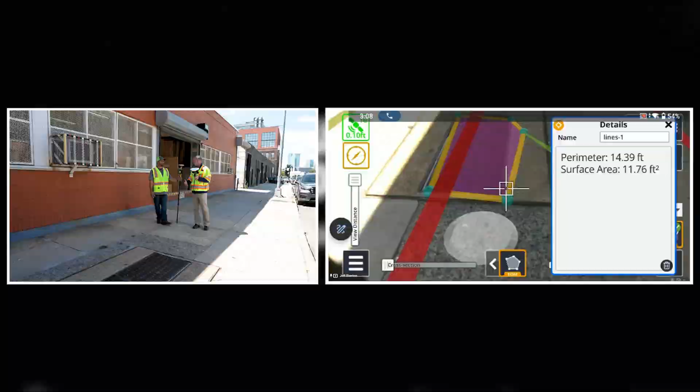Good afternoon, everyone. Actually, all of my presentation was covered in the previous panel, so everything I'm going to say is just a repeat of what the previous panel said. Trust but verify—AI is not there to replace engineers, so just brace for that. Repeat information, I've given you a heads up. All right, can we get the computer share on the screen?

As that comes through, what we're going to do is just walk over what 4M as a product is, a quick overview, and then Matt and Ed will go over a real-life scenario—what happens in real life, how do you tackle it, the challenges of utilities, and how hard it is to navigate through the maze that we have put up as a human civilization underground, and these guys have to deal with day in and day out. And then we will have, as Justin said, actual on-site demonstration.

There's a Trimble team out there. Today the weather is nice, so I'm not feeling sorry about that, but when they were in Georgia, they were out there in the cold. So today is a better day to be out. And they will demonstrate actual augmented reality, how the data from 4M streams to Trimble.

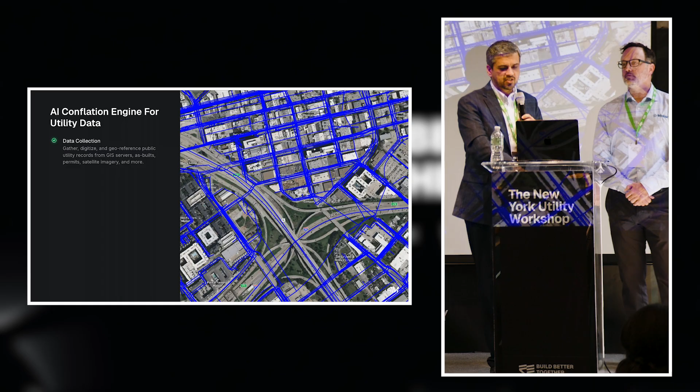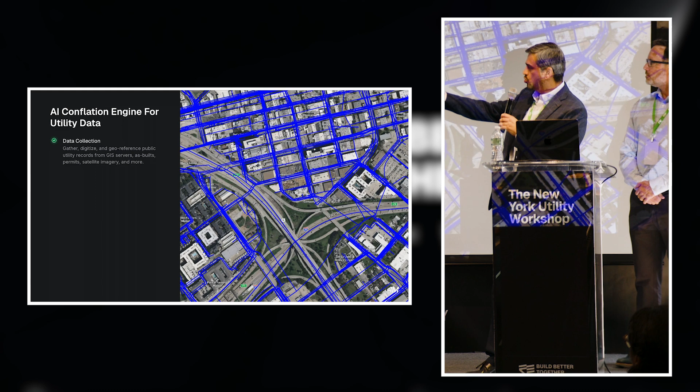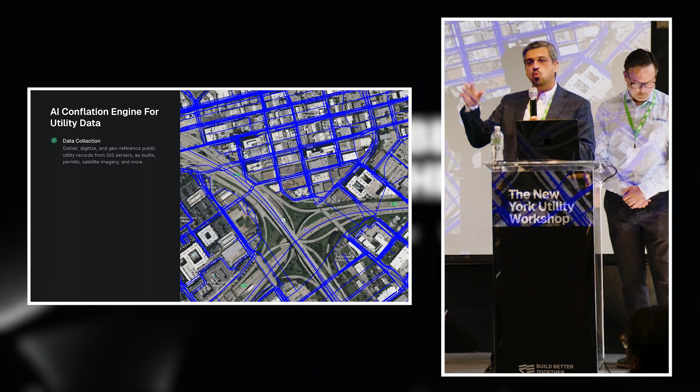So here is a quick overview of how 4M works. We started with collecting public records. Here's an actual view of Dallas downtown—all the lines you see are what we found in public records. In an urban environment, as you can see, it's not lack of data, it's too much data. One data source shows the line in the middle of the road, another says it's on the other side—it's chaos.

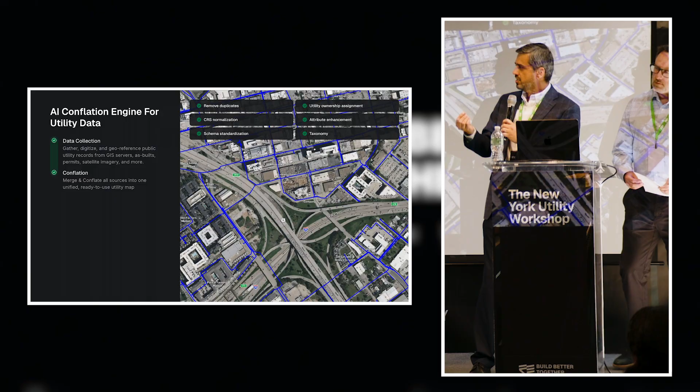So the first thing we built, about three years ago, is a conflation engine which can take all of these data sources, millions of records at a state level, bring it down, remove duplicates, and figure out the coordinate challenges. But that was just the start.

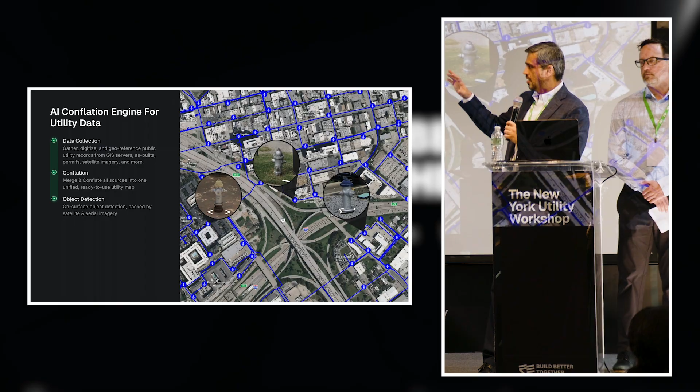Where we evolved from that point is now looking into the image processing side of things. So now we are combining the public records with actual imagery, street-level imagery, aerial imagery, satellite imagery, and finding evidences of where the utilities are. Those are on-surface utility objects, but we are not stopping there. We are going and identifying road marks. If you want to find out where the utilities are, today all you have to do is call 811 or submit a ticket, and someone will come put all these road marks on the ground.

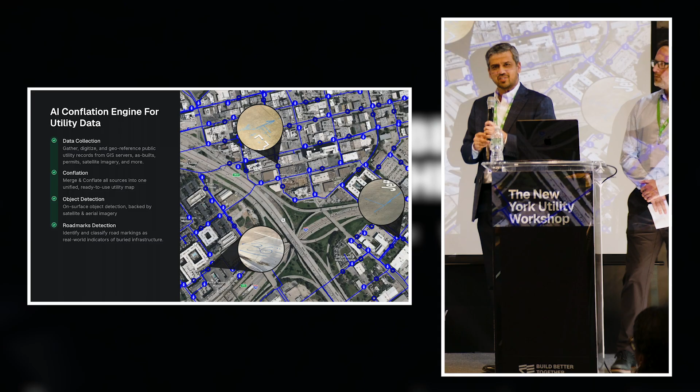So is the data truly secured and hidden? No, it's available to anyone. I can walk and literally figure out there are road marks on the ground for gas lines, right? So in a way, it's public information.

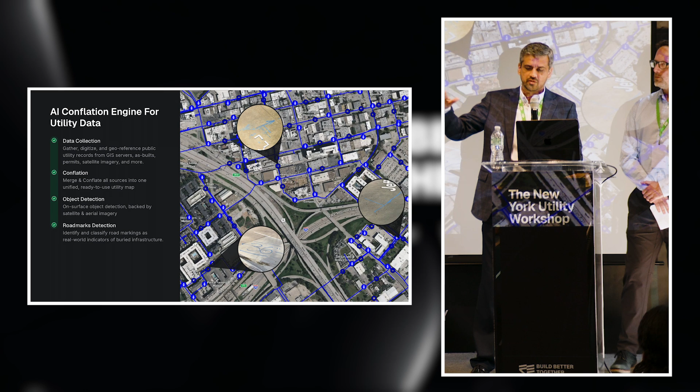So we are just honing on that fact, collecting historic imagery going back multiple years, and I'll show you in the demonstration. That creates a whole new product and intelligence layer, which is now bringing together the GIS records, the on-surface objects, and the road marks.

The next evolution, which will literally happen in a couple of months, is we are now going to create 4M-based lines, meaning these lines never existed in any record. There was no indication, no permit, no document in public record indicating the line existed. But now we have historic evidences where either based on the trenches, based on the locator marks, or based on the on-surface objects that we see, 4M can now compile all of this information from the history to the present.

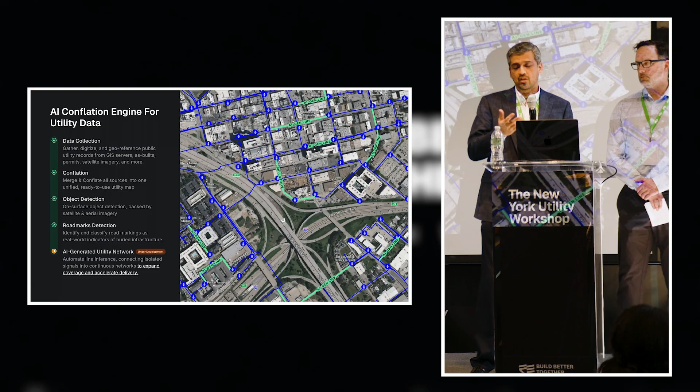And say we have a high degree of confidence a line is present over here, or a medium degree of confidence a line is somewhere over here. So not only are we giving you the information, but we are also sharing our confidence on that line, because in some situations we may have a very low degree of confidence that a line might be there. And you as an engineer, trust but verify — you need to go and act on that information.

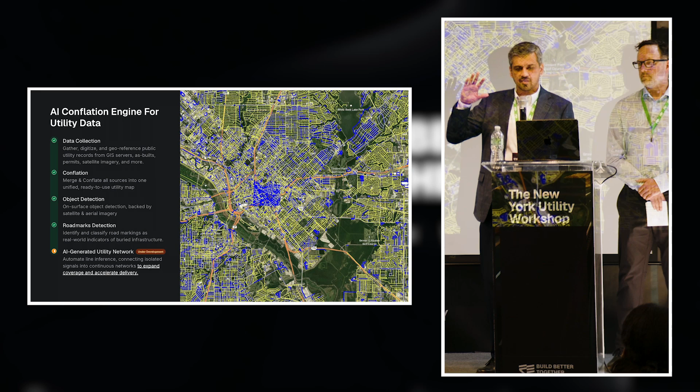So we are doing this at scale, so it's not only one particular project, but it's happening at a state level. By end of this year, it will happen at the entire nation level, all 50 states. And that truly creates a unique data set.

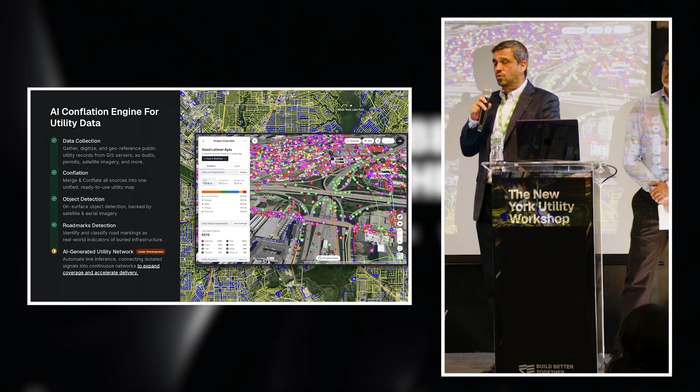Back to previous panel's discussion, like AI as a next-word prediction is what we have with these large language models. But with this type of data set, what we are building is truly a utility subsurface model, which will be way more than just predicting the next word — it's about predicting what are the challenges in infrastructure.

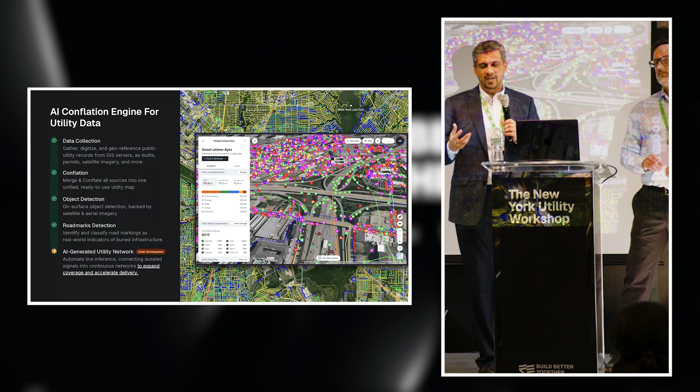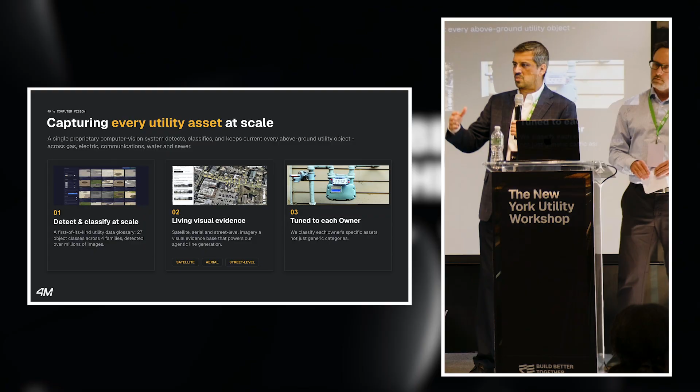As I said, we are detecting multiple evidences at scale, building that live visual evidence base. And for the utility owners, we are working with them to tune our model for particular evidences. For example, in the New York area, working with National Grid, they have certain indicators which are National Grid specific, so that's fine-tuning of our model. As we work with more and more owners, the quality of our visual inference becomes better and better.

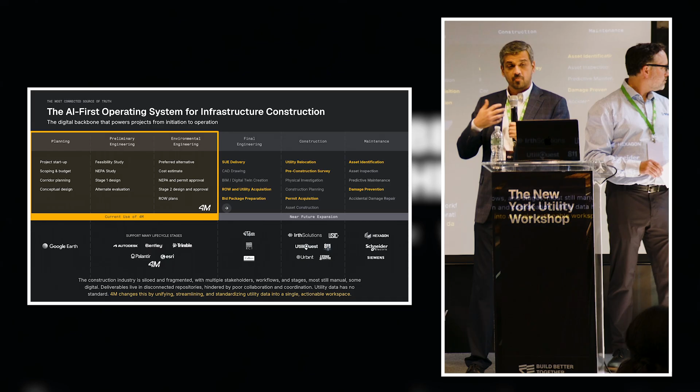This is something very interesting that we are finding. As Ed mentioned, we are working with multiple DOTs, and our initial proposition was — our data, again going back to the discussion of accuracy, we are not claiming our data is most accurate. So myself, as a product manager, I thought the best use case is in the planning phase, where you can use 4M to identify what risks and challenges you're going to face in that project. But as we started working with DOTs and utility owners, we're finding our information, the map we provide, is actually applicable in the later phases of the project too.

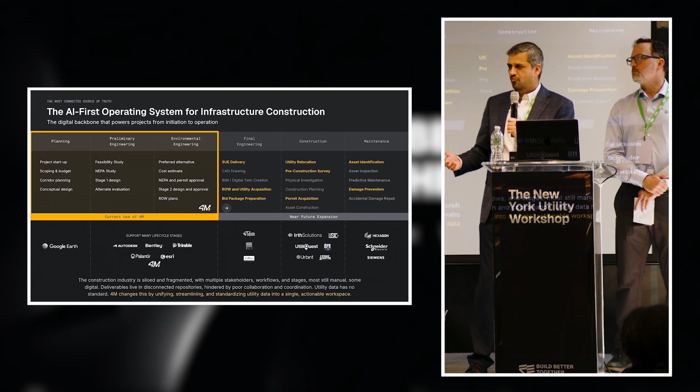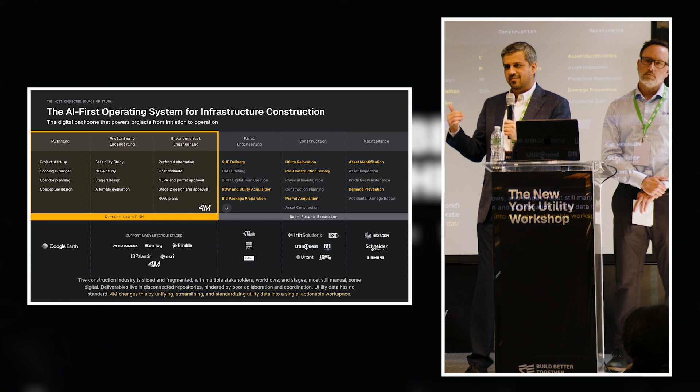We have DOTs using our product for emergency maintenance use cases, because without our product they were just going out there without any data, relying on surface objects alone. With our product, they have much better visibility going into a project. As we work with National Grid, there are damage prevention use cases that we are uncovering too.

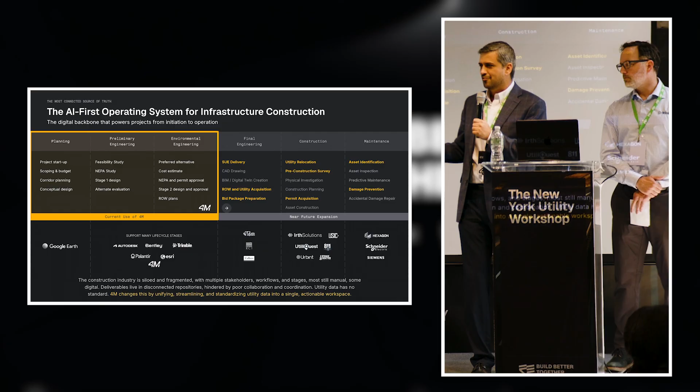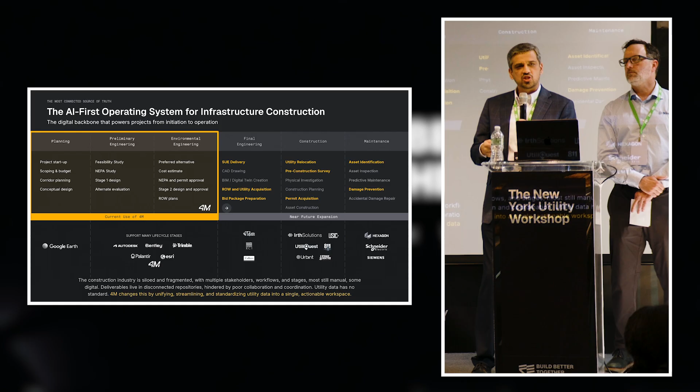So industry — and again, the topic of today's conference, Build Better Together — we are coming together, we as a technology provider, owners and engineers, figuring out how do we take this technology and how do we solve the multiple workflow challenges that we all face.

Before I jump into the actual use case, this is something we are evolving into: the 811 responds to a ticket dynamically based on our data. Again, this is not replacing any existing workflow at all. We're not saying don't send locators, that's not what we're saying. Rather, this is an additional technology, a due diligence you can do on a ticket on top of everything else. As an industry, we're all trying to reduce damages and make our infrastructure safer. Our product just adds another value addition to that overall ecosystem.

So with that being said, I'll hand it over to Ed to talk about the use case.

Perfect, all right Matt. So it sounds like you're dealing with the conflict and potential project. You want to give us a little overview on the site? Sure, so good afternoon everybody.

For today's exercise, I wanted to give the team the most realistic exercise to walk through. So the example we're going to give is on the street outside. The city of New York is replacing a water main that's 100 years old, and they're going to bid it out to a contractor for replacement. Exactly where they want to install their new water main, National Grid has a gas main in that area. So through the relationship with the city of New York, we're going to relocate our gas main, and National Grid is looking for the best location to relocate our gas main to give the city of New York the best lane possible to install their new water main.

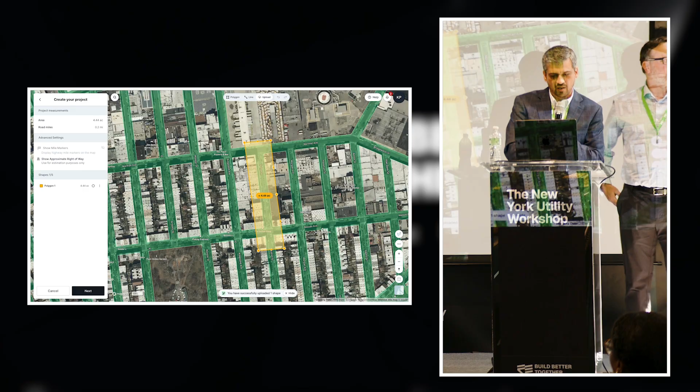So we'll start with a quick demonstration. We heard from Matt what the project is that we're going to do. So what I'll be doing is just coming to the product. I already have created a polygon, which is the exact location where we are at. I'm going to click on next. Let's call this gas excavation, energy, and let's say we are just studying what's out there.

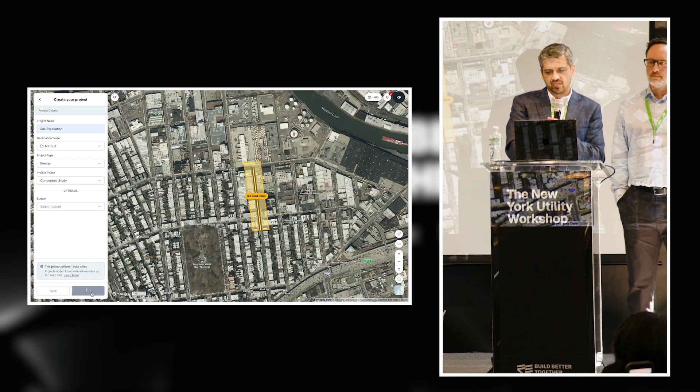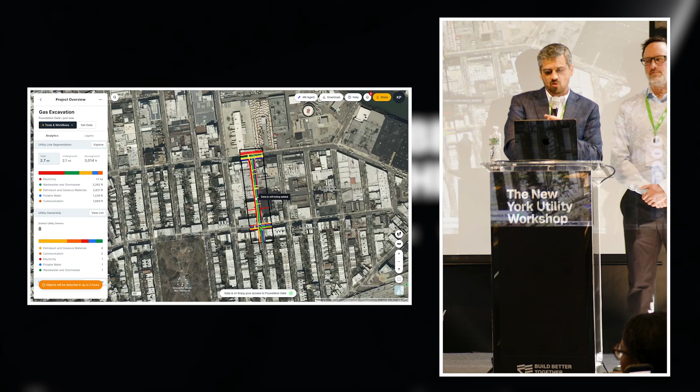And let's look at the utility map. So I hope my internet connection works. There, within seconds we have the GIS records streaming in, right? So all the GIS records that we have collected from public information is over here. But as I was mentioning, this is not enough.

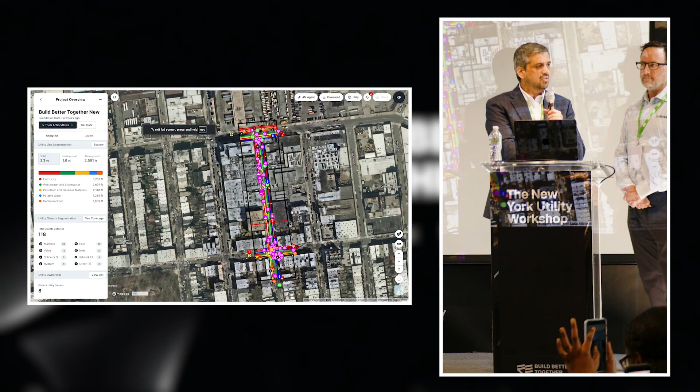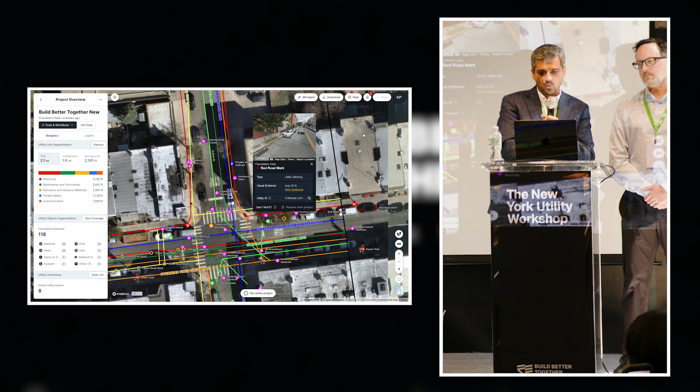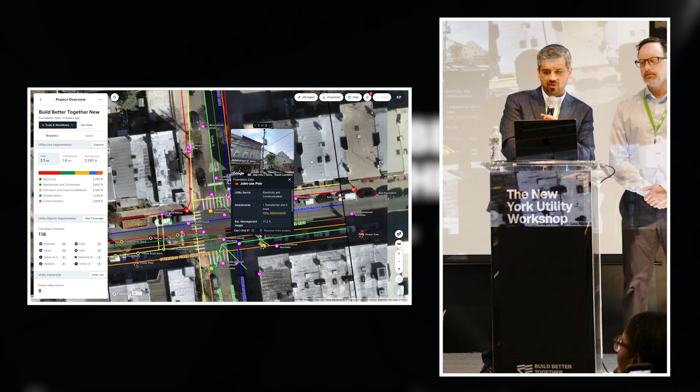Let's look at how the fully evolved product looks like. Within a few minutes, for this size of area, I'd say it will take 20 minutes. Within 20 minutes, we'll have all of this imagery-based analysis done. So we can say, all right, there are road marks that we identified. These road marks are coming from 2018. If we look at some other road marks over here, they're from 2021. If we look at the pole attachments, here we can see an electricity pole identified, the loop attachments, the splice enclosure, and let's actually go to the problem area.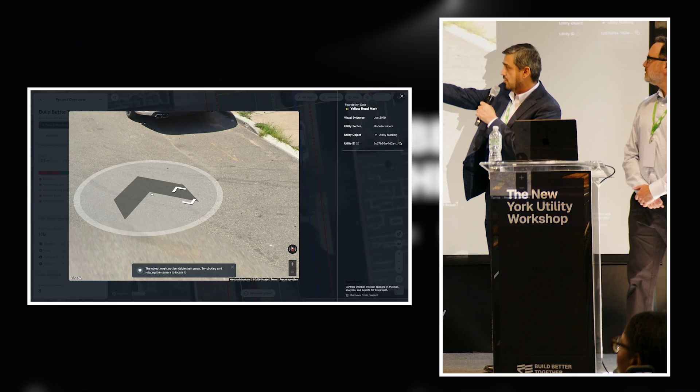So here, based on what Matt mentioned, National Grid has to move a line over there. So there are road marks. For example, you can see this yellow mark on the road that we've captured, how faint that is, but our algorithm is able to capture it. Not only capture that road mark, but place it on a map. That's something we've developed for the last two-plus years, the ability to capture things at scale across a different timeline.

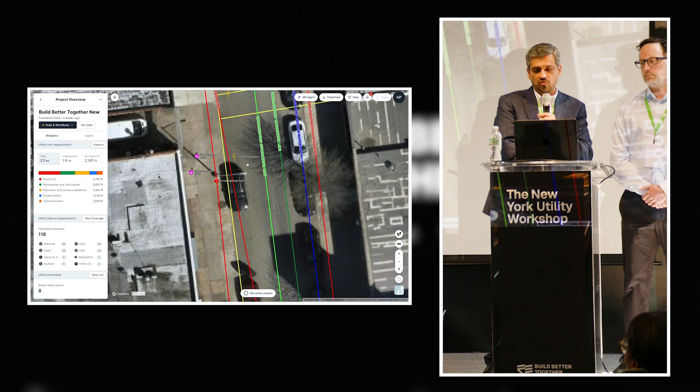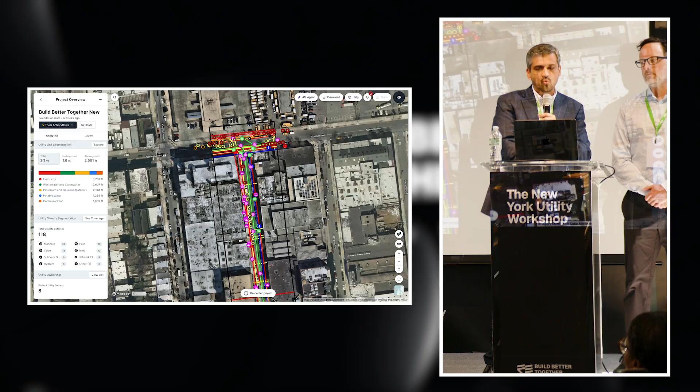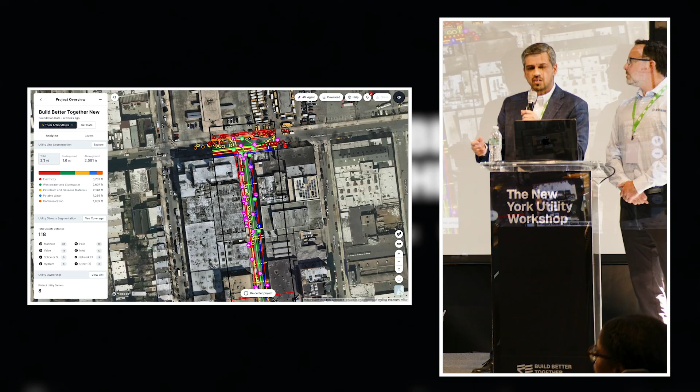So within a street, we can go back 4, 5, 6, up to 10 years, capture those things, and place it on a map. So when you're going out in the field, you have a very comprehensive view of what's out there. You can see the gas line road marks over here, plus some other utilities, plus some on-surface objects. That is literally what you get in a matter of a few minutes. To get to this level of data using conventional process, it would have taken maybe a few weeks, at least a few days. So now we've really crunched that time to first data using our product.

And I'll hand it over to you.

Thank you, KP. How many of you are familiar with Trimble by a show of hands? Okay, all right, good amount. So what you see here is Trimble Connect, and through an integration that we've done with 4M, we've been able to pull that data into our common data environment called Trimble Connect.

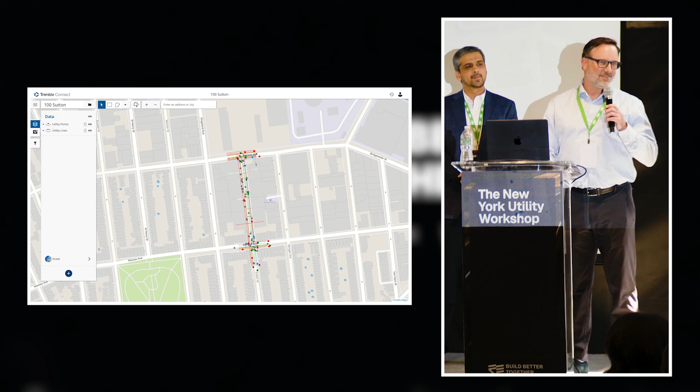Most people know Trimble as a survey company—GPS, surveying, mapping. I'm still learning, after 17 years, all of the things that Trimble can do in the construction world: building construction, land construction, road construction.

Trimble Connect sits at the center of the physical and the digital world. Trimble has lots of office tools that allow you to plan, permit, maintain, design, and engineer in the office. We also have our survey tools, scanning tools, and data management tools for our field crews. Between that digital and physical world is what you see here, Trimble Connect.

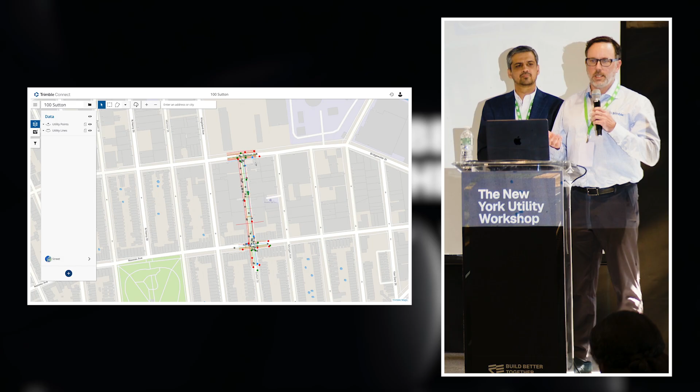This rich data set coming from 4M, using their methods to capture this data, is pulled in by this Trimble extension. That enables us to use any number of tools Trimble has available to field workers to update that information, to validate it, whether with a traditional survey tool like Trimble Access, collect additional information and photos using a GIS data collection tool like Trimble TerraFlex, or, as we're going to see in a live demonstration from outside, visualize this data using augmented reality. That tool is called Trimble SiteVision.

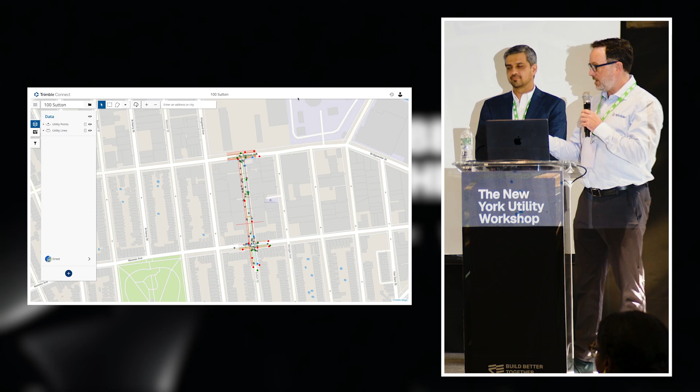So I think with that, Ed, we're going to go do a... Sounds good, yeah. We've got our guys out there—they've got the data in Connect, so let's see what they're seeing.

Really appreciate the time and the opportunity to share some of this technology with you. What we're going to show you today is a couple of different platforms showing the same Trimble field application called Trimble SiteVision, an augmented reality view of all types of data.

What we're going to show you today is an unadulterated view of the data that came from 4M into the Trimble Connect platform, and we'll show that in SiteVision in a way that gives a newfound context to data that you might have otherwise just studied on a map on a screen or on a paper plan.

So let's just take it away and walk through some of the features of SiteVision. I've got it here on a handle—it's got a built-in EDM for taking measurements, a smaller phone-based device. Justin here is carrying the same application on a pole mounted with an iPad. So depending on how you want to take it to the field, you've got a couple of different options. Let's take it away and look at some of the data.

What you're seeing here is all of the 4M data overlaid in the real world context. You'll see some of the electrical conduit information, the gas line information—anything that came from 4M is immediately visible here. Now you can see that all in this context.

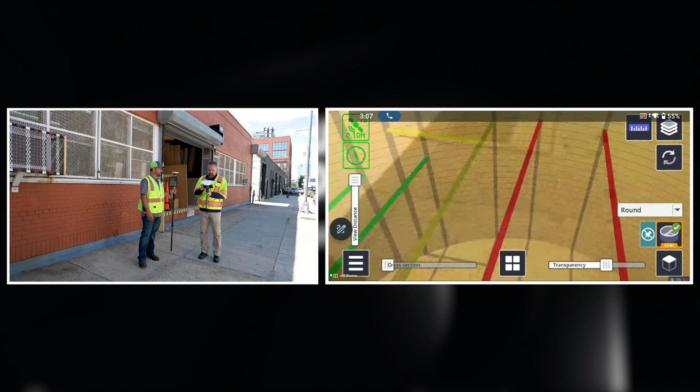We've got a couple of different views. I'm viewing surface only, but if we wanted to take a look at what it looked like in a pit, giving an idea of the different depths of elevation for some of the features, turning transparency on and off gives you different kinds of views to the data that you certainly wouldn't have anywhere in the office.

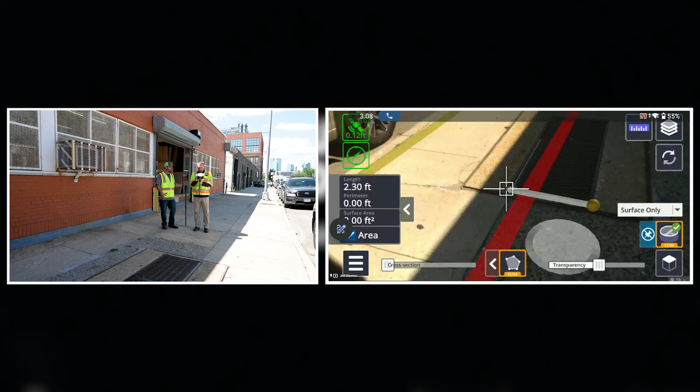Let's measure this so we can send that back to design. As we're doing this initial walkthrough, we also have the capability to do measurements. So we're going to measure this vault and bring that back to design. When we look at that new location, we're able to show this vault in there as well.

I'm just going to take the smaller one here. This kind of information, the fact that you can capture this in the field, gives you the ability to capture data that wasn't originally part of the data set, but it's obviously part of the field exploration you're doing here. We can bring this kind of data back into the office.

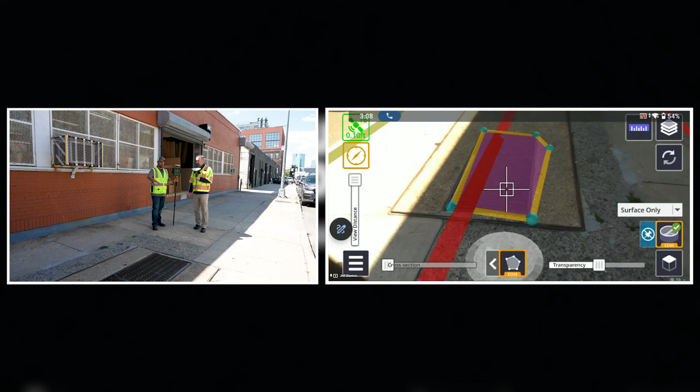The iPads do have a LiDAR sensor, so if we wanted to take a point cloud, a scan of this with SiteVision and the iPad, we could do that as well. Right now we're just sharing this piece of equipment. Another thing to note is that with the EDM measurement, you can take those measurements without physically being there with the pole, which is a big advantage when doing these initial walkthroughs.

So what you're seeing here is an illustration of some of the existing gas infrastructure, in addition to some others. You can kind of see there's a lateral here. We're not super spatially accurate, but at least the data set is representative of the fact that there's a main, a service, a T, and the valve here.

Some really powerful context can be gained here by taking this data out into the field in augmented reality. With that, I think Justin and I are going to continue our field exploration and head back to the office to talk a little more about design. We'll be back with you in a minute.

Maybe you guys can talk about that first field visit, just identifying the data, taking some measurements, seeing how much was the actual offset. From there, can you explain what would be the process from WSP's point of view?

Yeah, a lot of times we'll do what we call a constructability review. It's just verifying your site. 4M is a data layer that we use today for both our utility owners and utility contractors to help our own team with planning and logistics. For you, Matt, it's going to help on the design engineering side, but also with logistics and planning for your team or your contractor to come out.

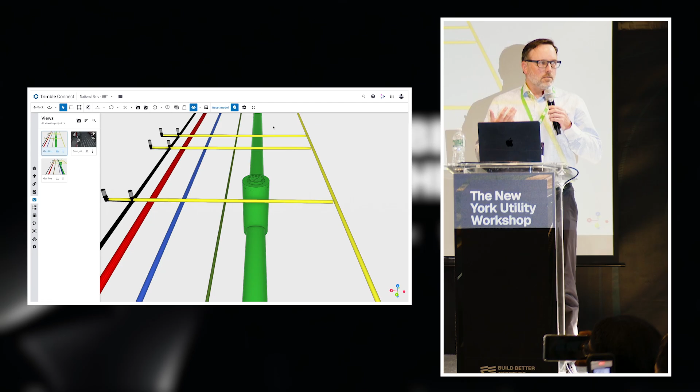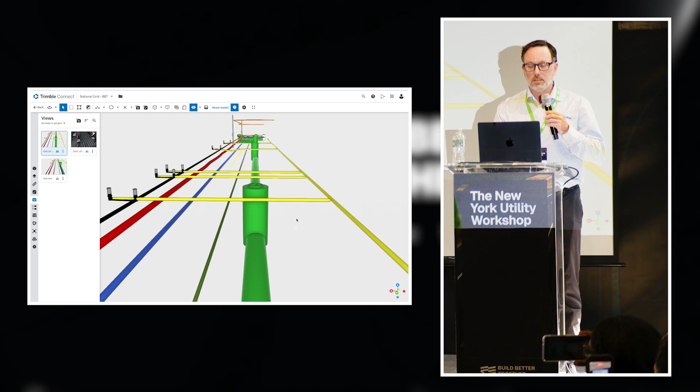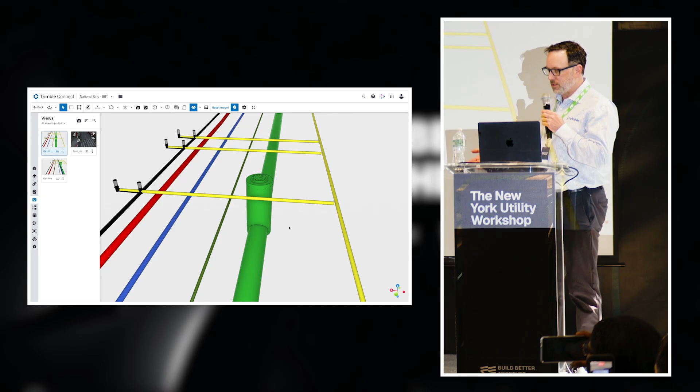This is Trimble Connect, an open cloud common data environment, so it supports all the industry standard models you'd expect something like this to support. We can see the existing gas lines in yellow, and the proposed relocation of those gas lines in black. One expectation was that we'd eliminate the crossings. Correct, so with this we're moving them to the other side of the street where we're no longer interfering with any of the other utilities.

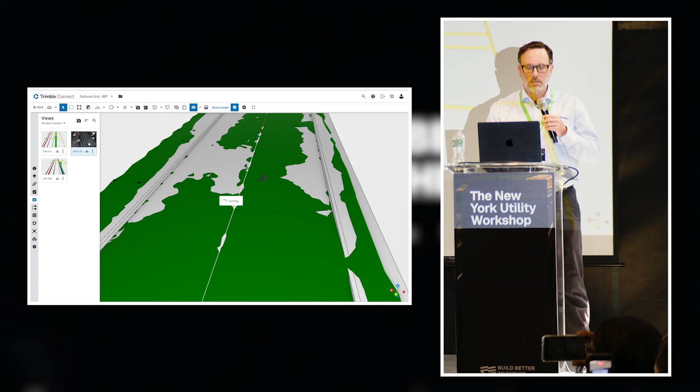Just to give some extra context to this project, we can visualize it with the point clouds coming in to show what it's going to look like, what kind of impacts to the surrounding environment are going to happen, using this rich point cloud and imagery data set we captured with the Trimble mobile mapping systems. Underneath this is all of the spatial data and the design that Ed and his team have created.

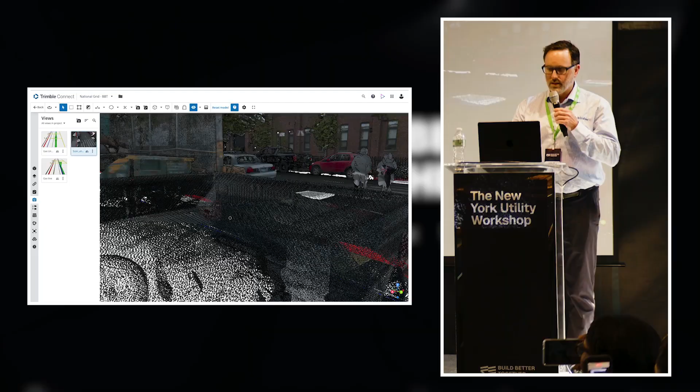So with that, I think the team is now going to visualize this project, and I'm going to use the word—I think I'm going to use it right—constructability walkthrough. Man, I love that word. The team is going to walk through this and see if any other issues come up, or if this is a project that can begin to move forward.

Back out to the field. Right on. Yeah, so we've got the existing gas main in here, and the proposed now out in the field.

So we'll show you where the existing is, and then we're going to cross the street to where the new proposed design is, and make sure there's nothing else we see of any immediate conflicts to that new proposed location.

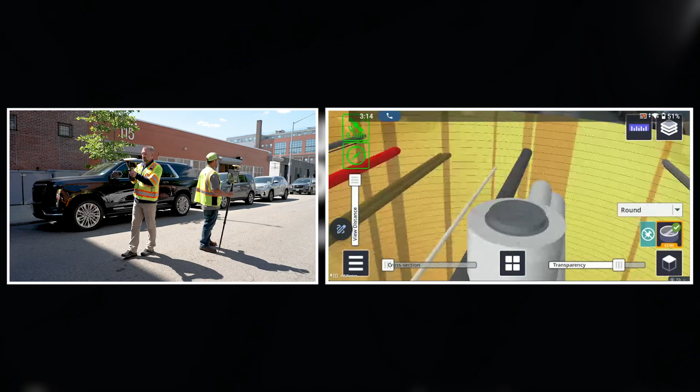What you're seeing here as we walk through this is the model that Darren just showed—the IFC model of the utility design created by the WSB folks. Now, because it's properly georeferenced, we can visualize this model, the same one you saw in the office, out here in the field. All this information is available in this view, which is fascinating given the context you're able to achieve in this environment.

So you can see the manhole appears where the manhole actually is in the design. But most importantly, what we're showing here is that the proposed gas conduit is actually on the far side of the street now. That's all part of this model, and the fact that I can spin around here and see all of the data in this model in reality lets us get a good sense of whether this is truly constructible or if we need to make modifications.

So a lot of context to be had as part of the ability to see this model in the real world. It's again a very, very powerful tool and visualization object.

So we're going to continue walking through there, and show that proposed gas line over on this side of the street here.

So there is, and this is another important thing, we're viewing a lot of that existing utility data here. This gives us that view for when we come out here in the field—there's no locates. We have our proposed gas, but the gas company contractor is going to have to work with the electric company if they don't relocate their line ahead of time.